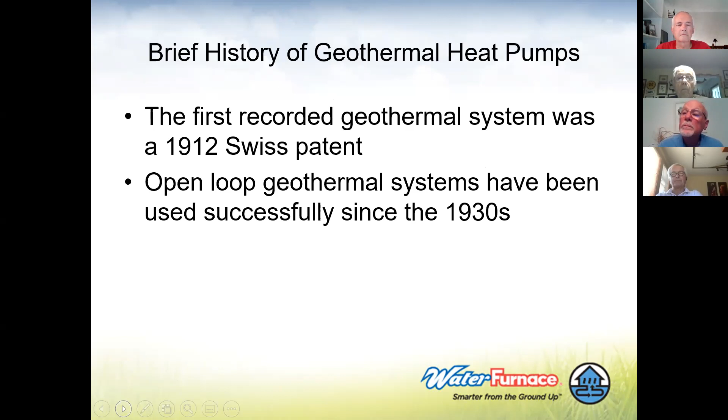Brief history: they recorded geothermal systems back in 1912. That was a Swiss patent.

Edison Electric Institute sponsored closed loop research back in the 40s and 50s, and they were doing closed loop systems back in the 70s. The company I work for, WaterFurnace International, has been in business since the mid-to-early 80s, and they've been a leader in the industry with technology, innovation, and training, and everything that's needed to make sure you have a good, viable system.

What it does come down to is transferring heat—it's the thermal conductivity and the heat of transfer, where hot moves to cold. If you have a system producing a 10 to 15 degree temperature difference, either through the fluid running through the loop or from an open water loop where it's a pump and dump, there's a great amount of energy to be exchanged or transferred.

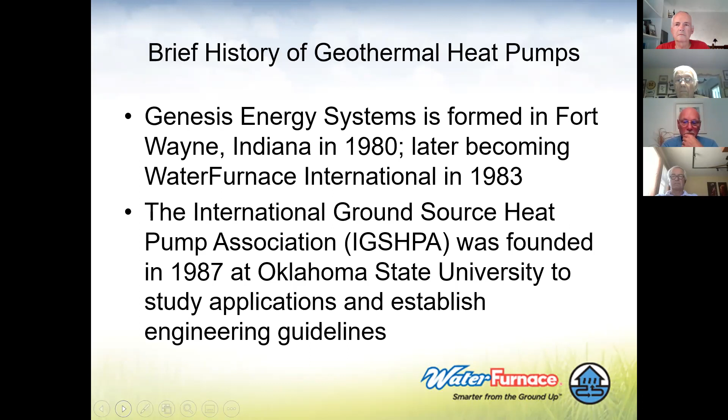In fact, it's 400 to 500 percent more efficient than a gas fossil fuel appliance would be.

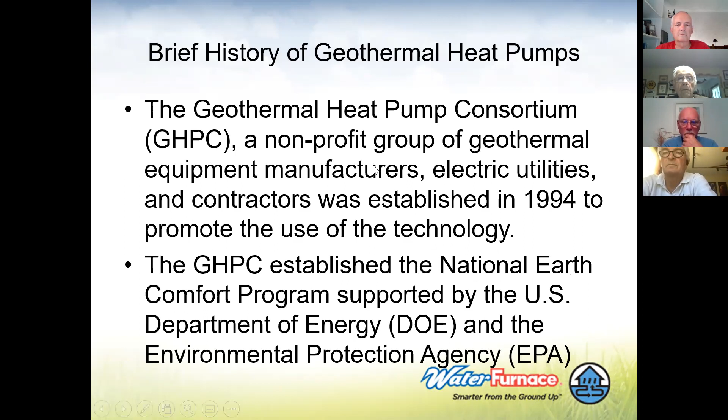There are some organizations—we have the IGSHPA organization, based out of Oklahoma and the college there, and they've done a lot of research and helped build our industry with training and thermal conductivity testing, making sure that loops are sized properly to the systems and BTU loads.

But basically, we're trading off electric—we're using electric and gaining BTUs. And basically, they say 60 to 70% of the energy we use daily is to keep us comfortable, whether in our houses, our homes, or our businesses.

So now we're using a low temperature geothermal, whereas they also have high temperature geothermal, out in hot springs and geysers and so forth, where they are trapping that energy and doing more with that type of energy—transferring it into turning turbines and actually generating electricity.

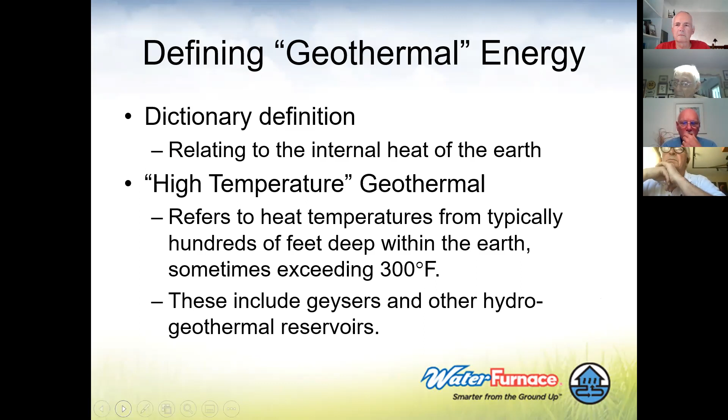But we're using a low temperature type of geothermal where we're using shallow earth temperatures. What makes that such a viable thing, especially in the heating season, is that the earth always stays at 50 to 55 degrees. But actually, when I go further up north and we do our load calculations on a Geolink program, I'm seeing that we're using earth temperatures up north—let's say north of Traverse City—about 45 degrees, compared to down here, which is like 50 to 52 degrees.

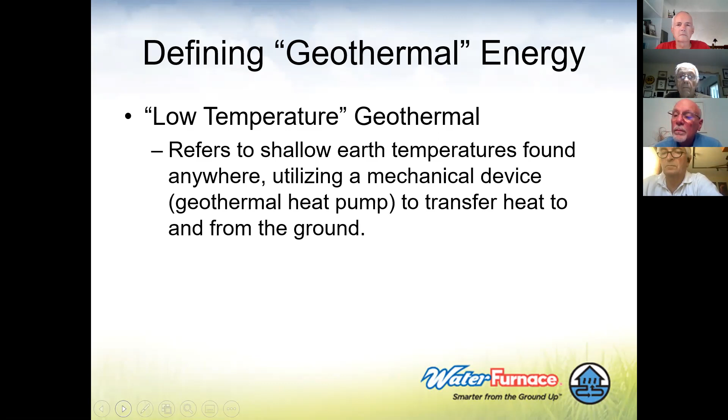So we do take that into consideration—how the earth temperature varies with the different climates depending on how far north you really are.

So we have water-to-air or water-to-water systems, where a water system would be similar to a boiler, and we're connecting it to a plastic pipe buried out in the earth. You could put it in a pond, or put a lake plate in, or do an open loop where it's pump and dump, as long as you have good, clean water that doesn't build up scale or minerals. And again, all we're doing is transferring heat.

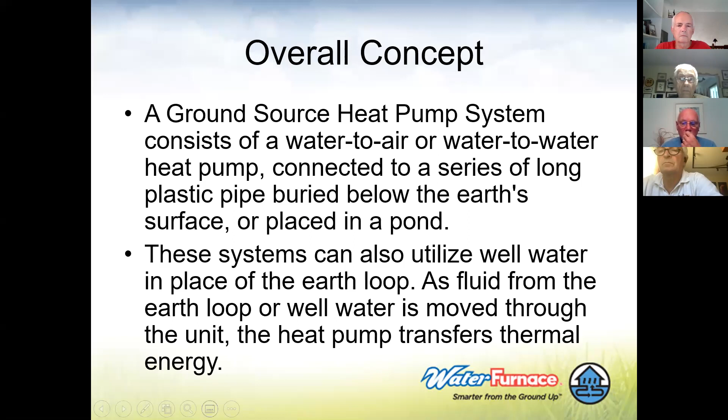So it's a big solar collector. The Earth is. It's storing our heat energy, and then air temperatures may fluctuate.

So like an air conditioner in the hot, humid summer days right now, we're getting rid of the heat in the home, and as we're discharging in the air product, it's hot air. We're trying to discharge hot temperature in the hot air.

Air conditioning, I'm gonna brag about this. My cooling bill in a 3,000 square foot home, calculated and monitored on our Symphony system, is about $25 a month here during these hot days and winter months. Yet I'm using more electric in the winter for my heating, but in the summertime, oh my gosh, the cooling—and it's great for the power companies because it helps reduce peak demand.

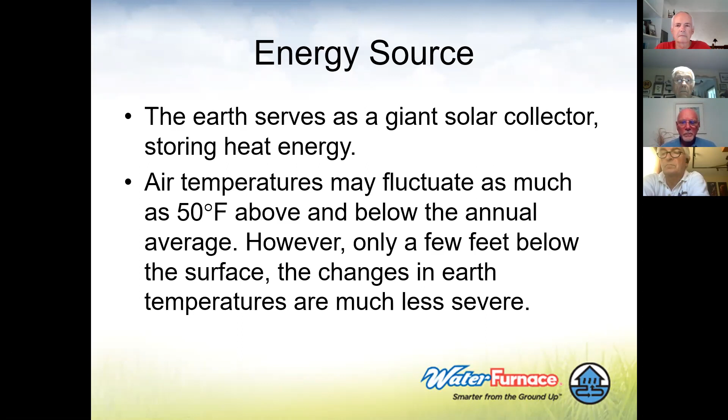But outdoor air temperatures, when you need an air conditioner to be most efficient, it's not, because it's hot and humid, and it's hard to get rid of that heat that we're working with.

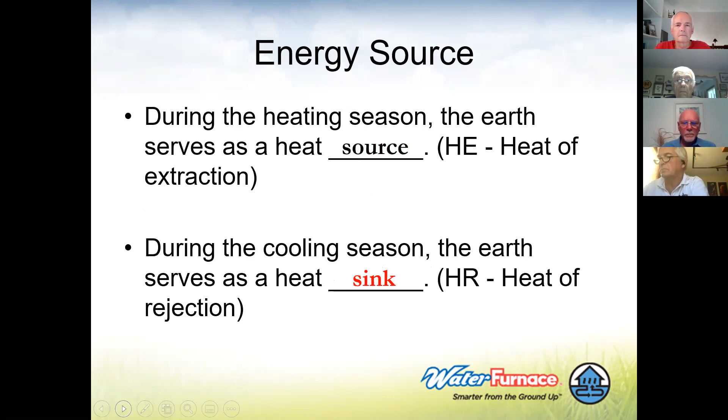So we're using the heat as a heat of extraction for the heating. We're pulling heat from the earth, and then in the cooling season, we're doing heat of rejection, where we're rejecting the heat back into the earth. That's our source, what we're getting from the earth. And then when we do our sink, that's what we're pulling from the loop and bringing into the home.

So we can put the loops horizontal, vertically, or lay them in a pond.

We do use antifreeze in the system, and it's usually about 10% of the system. A 4-ton system, which is like 48,000 BTUs, would have about 4 circuits, maybe 400 to 600 feet in length in plastic tubing, and might hold around 100 gallons of water. At that point, you're using about 10 gallons of ethanol, or you could do it all in glycol.

Also, that food-grade, safe type of product with glycol—but with the mixture of ethanol, it's not very harmful at all if you did have a leak, and it does evaporate. But it is one of the best ways to keep your loop medium from freezing and still have a really good heat transfer.

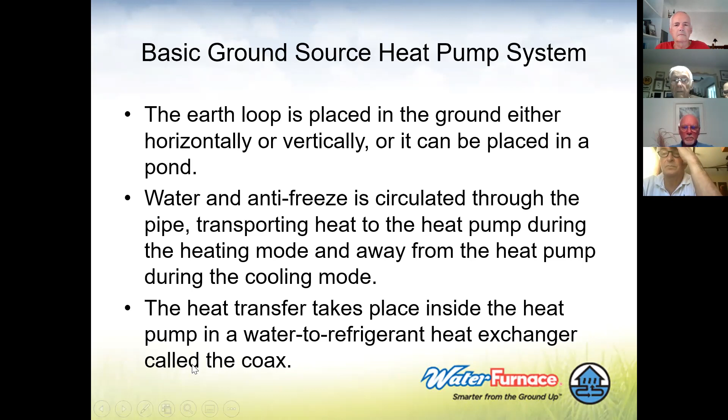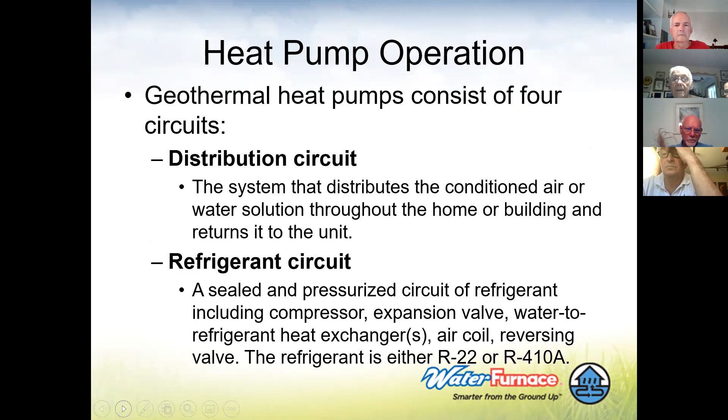And that's happening in what we call the coax heat exchanger inside the unit. So we have a distribution circuit, that's where we're moving the water solution from the loop area out into the unit, into the house. And then we have a refrigeration circuit that transfers that heat and brings it to a higher temperature for heating, or again rejects it for cooling.

And with refrigerant—if not everybody knows how a refrigerator works—we're actually just removing heat from the space. The evaporator inside your freezer takes liquid refrigerant and atomizes it to a fine mist. And when refrigerant is a fine mist, it absorbs the heat.

So as we absorb the heat in that space, that gas is then compressed in the compressor and condensed back to a liquid, which is your condenser, back underneath or behind your refrigerator. And that's where we reject the heat. So refrigerant in a vapor state absorbs heat, and refrigerant in a liquid state rejects the heat.

And that was the philosophy and invention of Mr. Carrier, basically, who's one of the gentlemen that patented that type of system.

But then we could also take the heat that we're rejecting from the house for air conditioning, and apply that heat to the hot water and give you free hot water. We call that a hot water generator. It also generates hot water for—

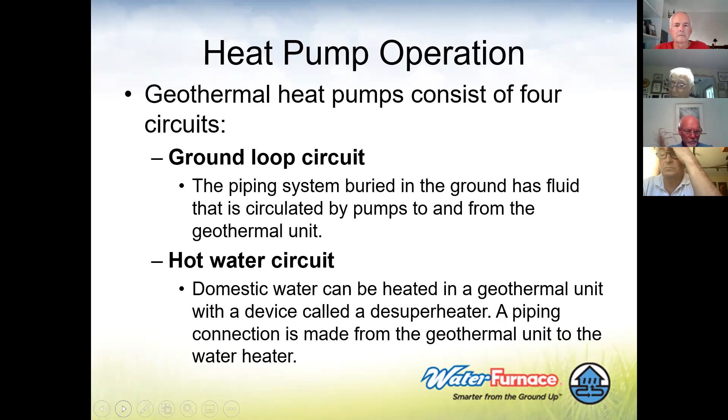during the heating season, but basically the geothermal concentrates and works mostly to heat the home.

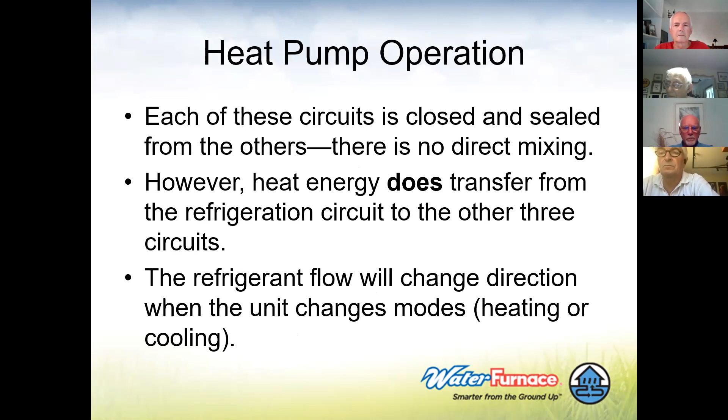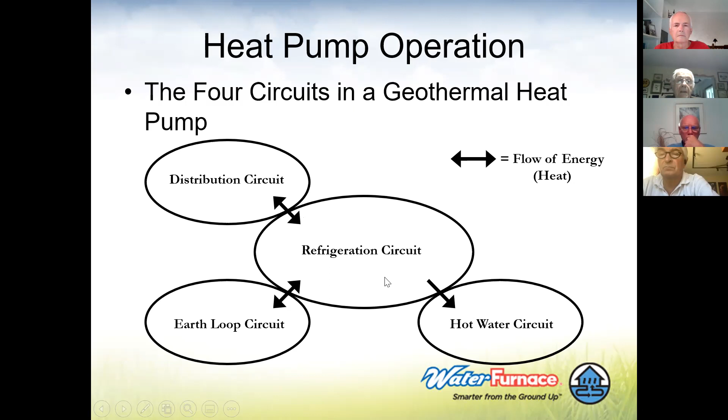So we do sealed transfer again of the water that goes through the loop through the refrigeration circuit, which is called a coax coil. This is kind of like a flow of how everything works. You've got your earth loop, heat moving to the refrigeration circuit, heat moving to the hot water circuit, and your distribution circuit. So it all works in conjunction.

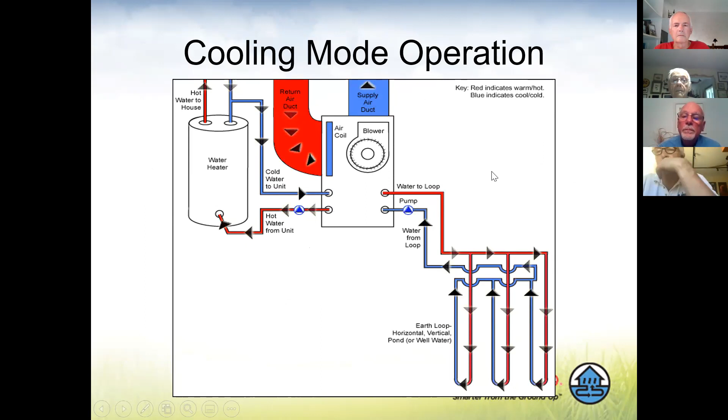And if we had an open loop system, you'd be using your well pump, which is a 230 volt, half horsepower pump that uses a lot of energy. We go about 2 gallons per minute per ton. So if you had a 4-ton unit, an average size unit, you're using 8 gallons a minute as the unit's operating.

And if you think about it, that unit operates 2,800 hours a year—you're moving about 1.25 million gallons of water. So you have to have a place to dump it, either a pond, a dry well, or a lake. And you could go up to 10 tons of capacity into a public pond or lake.

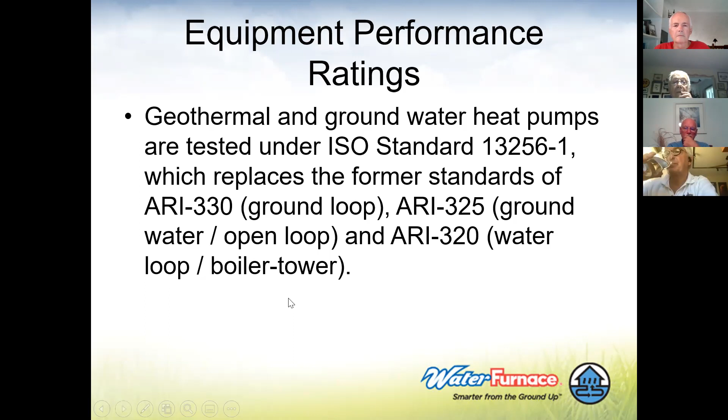We're using plastic piping that is similar for the loop material. It's fused together with hot irons at 450 to 500 degrees, similar to the yellow plastic pipe they use for natural gas piping.

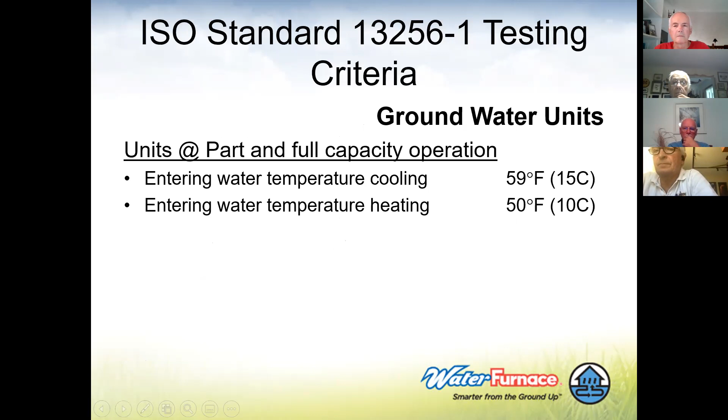A lot of the capacity and efficiencies are based on what our temperatures are and what loop we're working with.

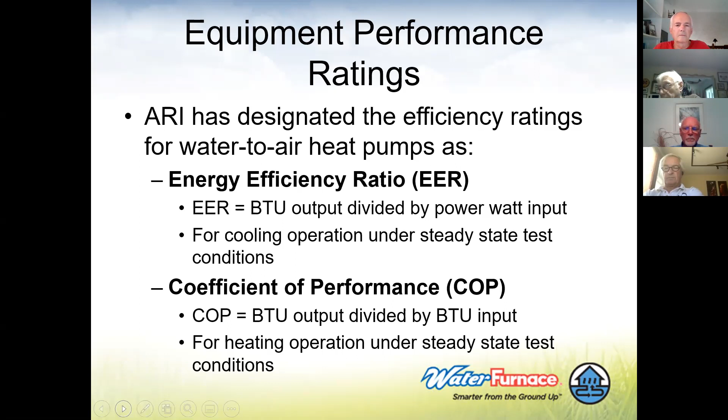They also compare our energy efficiencies against air-to-air products, where they use a SEER rating and we use an EER rating, an energy efficiency rating based on full load, for air conditioning. In the heating mode, it's called coefficient of performance, and most geothermal units run anywhere from 3.5 to 5.0 coefficients of performance.

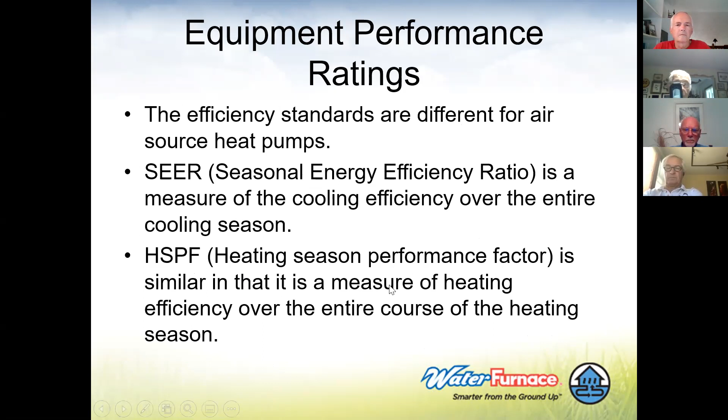Those standards are different for air source systems — seasonal energy efficiency ratio, which measures cooling efficiency over the entire cooling season. Their heating side is called the heating season performance factor, measuring efficiency over the entire course of a heating season.

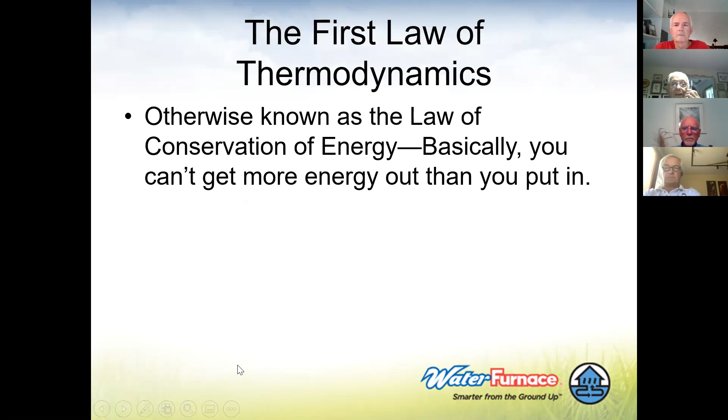The first and second laws of thermodynamics involve conservation of energy. Basically, you can't get more energy out than you put in. The second law is that heat energy flows from an area of high heat to an area of low heat — you cannot stop that process, you can only speed it up or slow it down.

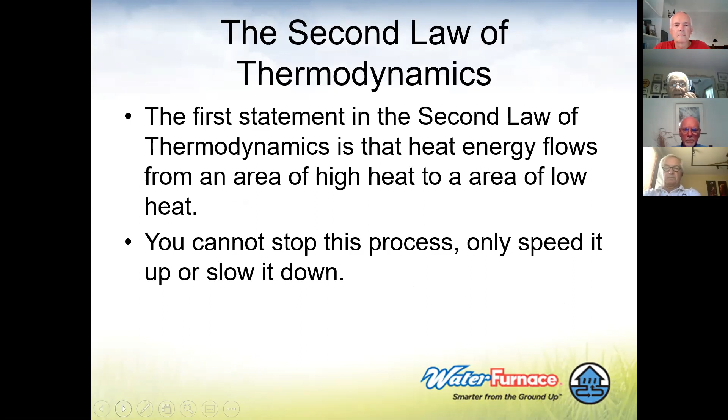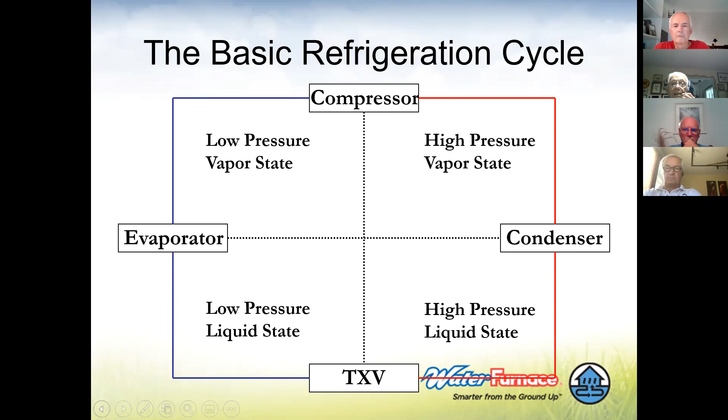A lot of people don't understand how a refrigerator gets cold — they just say 'I plug it in.' But really, that's what it's all about.

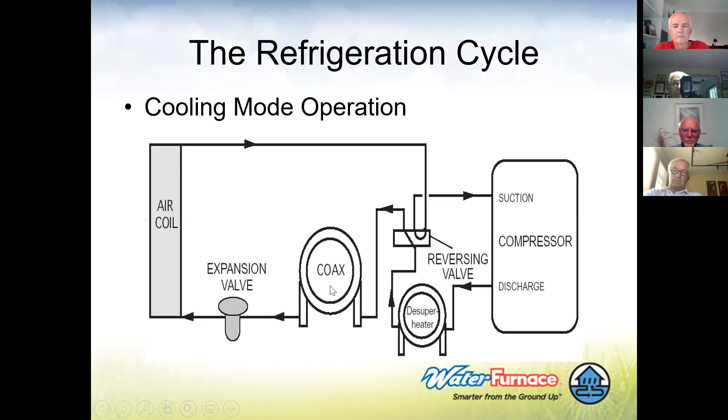Here's our coaxial coil, where our loop water and refrigerant coexist with each other — that's one reason why they call it coax. That's where we transfer heat and cooling when it's operating. There's a reversing valve that reverses the flow of refrigerant in the opposite direction, which changes the evaporator to a condenser and the condenser to an evaporator.

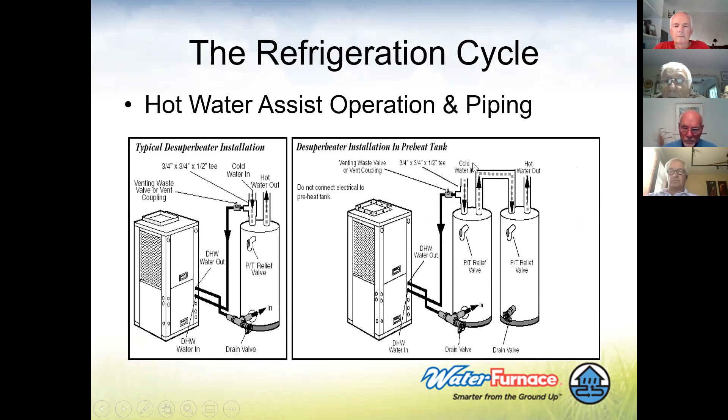Then we do hot water assist, which we call a desuperheater. We connect it to the unit and like to go to a storage tank, because the storage tank holds that hot water — all that free heat. As you start using hot water, it's already preheated and you're using a lot less energy.

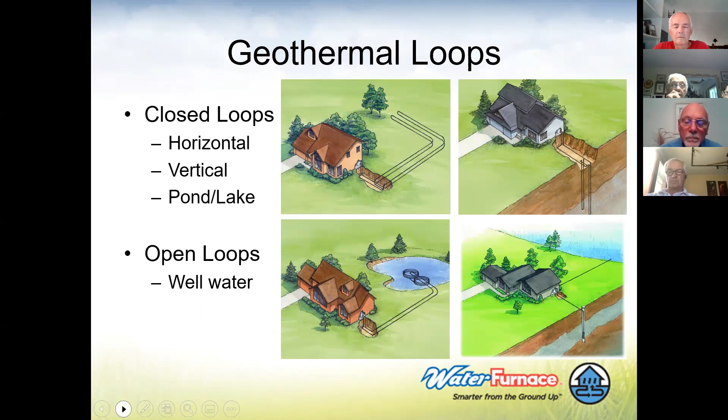So you've got your horizontal trench loop here, vertical loops, an open loop pulling groundwater, and pond loops. They could also put in lake loops, or what they call a stainless steel lake plate, and these could also be put in as a slinky. Let's say these loops are maybe 150 feet long with 2 pipes in there — you could actually put 4 pipes in there. They'll also lay a slinky pipe down in this trench, which can hold more pipe in that space and still have very good heat transfer. We're using the polyethylene piping.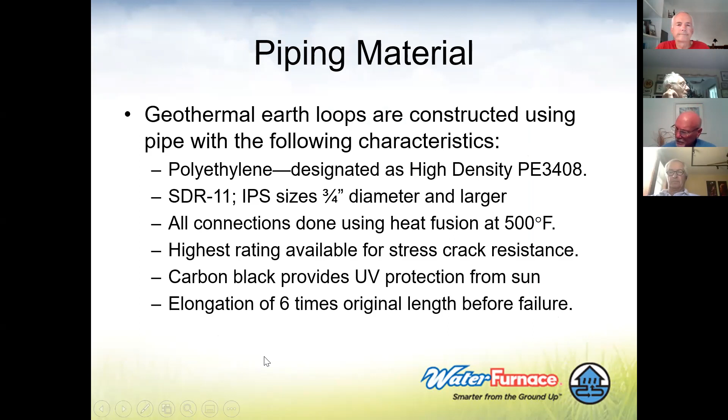Normally our size is 3/4 inch out in the loop area, and we come back to like 1.25 inches. But as the systems and houses are bigger, you might have 3-4 systems and 2-inch pipe coming into the house. Or in a commercial application, I've seen as big as 12-inch main coming in from the different well circuits outside.

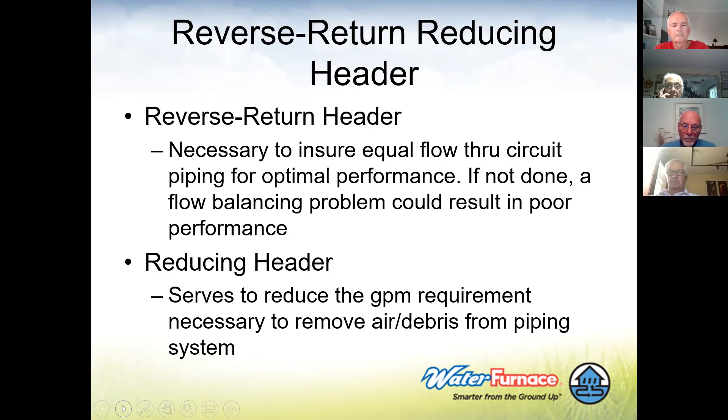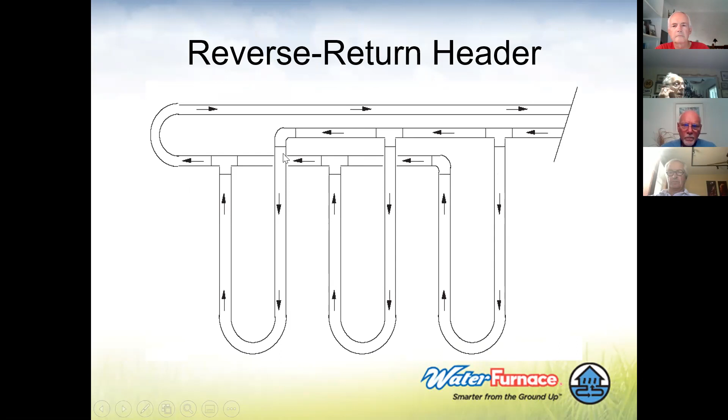They do a reverse return header, and they do a reverse and reducing header. So as they do our header out here for the looping, for each circuit it's a reverse return, bringing the water through and then bringing it back. It mixes everything up good. We also like to see as much air removed as possible. They use a flush cart to fill the system up and also remove and extract any air that might be in the system, since it's a closed loop system.

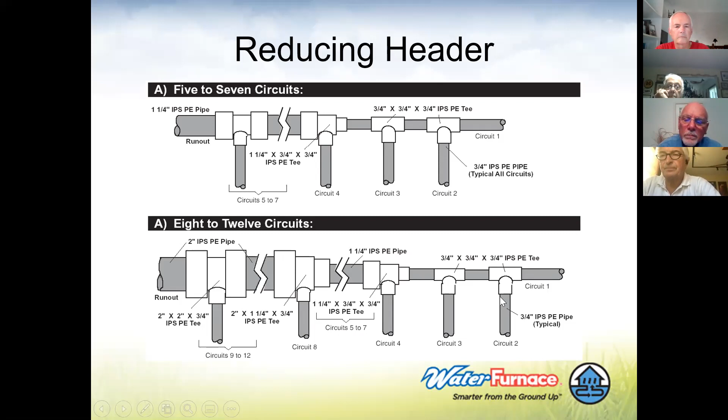Now here they are showing a reduced setup, like 8 to 12 circuits. So they're using 2-inch PVC or PE pipe down to 1.25 inches, down to the 3/4 inch circuits. And again, that's all about pump pressure and head pressure and working efficiently with our pumps, so we're not creating more energy trying to pump a system that has high head pressure.

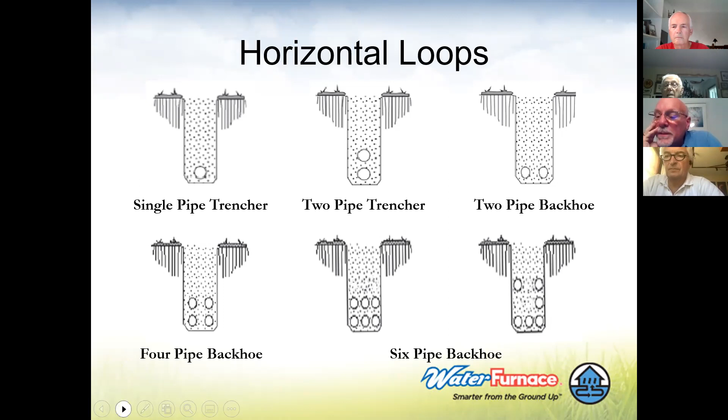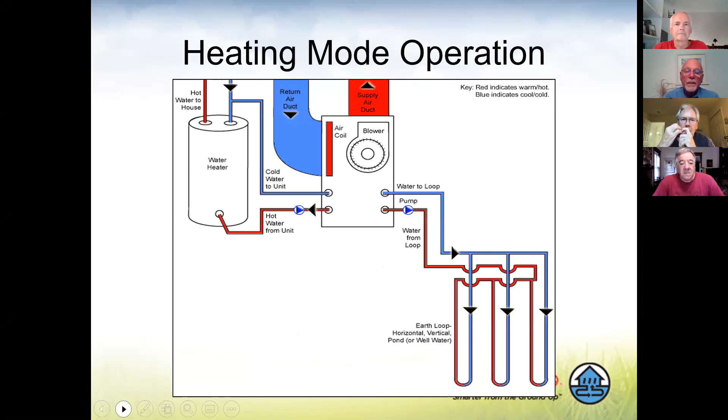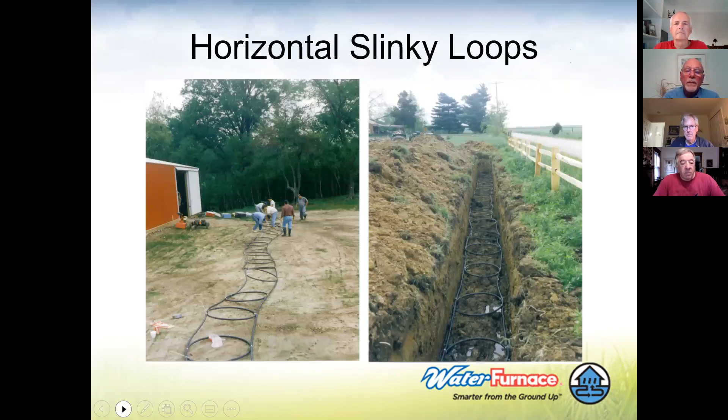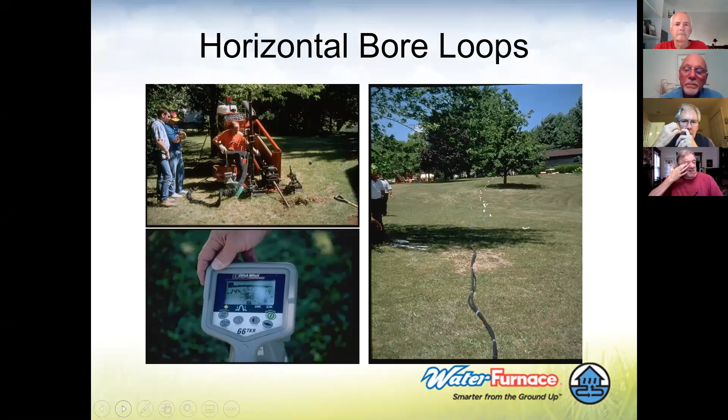So here's the slinky loop. And then they were doing horizontal directional bore, and that does get a little more expensive because they're charging us more to use that machine to do that. Same thing with vertical bore. When they come out and do vertical, we're paying for a well guy to come out with a $750,000 machine to drill 200 foot down and drop our pipe in.

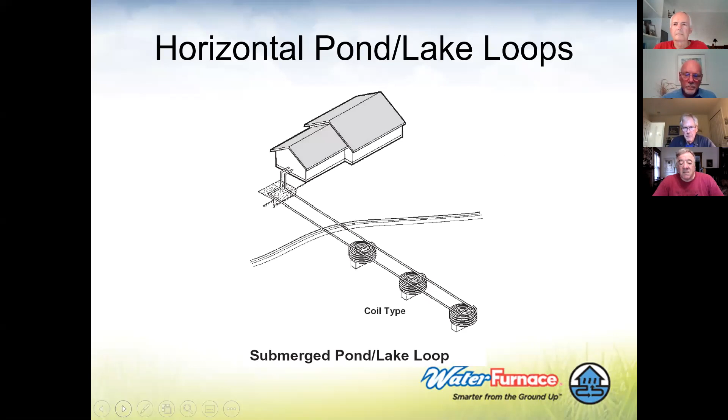And then our contractor comes back and digs horizontally and connects all that up, about 5 foot down. But they also use these coil pipes set up for horizontal pond or lake loops, and they'll use them in 300-foot coils with spacers in between to help transfer heat more efficiently.

Here's a big job going in a school, they'd lay that in a big pond. And here's the lake plate, Slim Jim. So they could lay that under their dock or something of that nature.

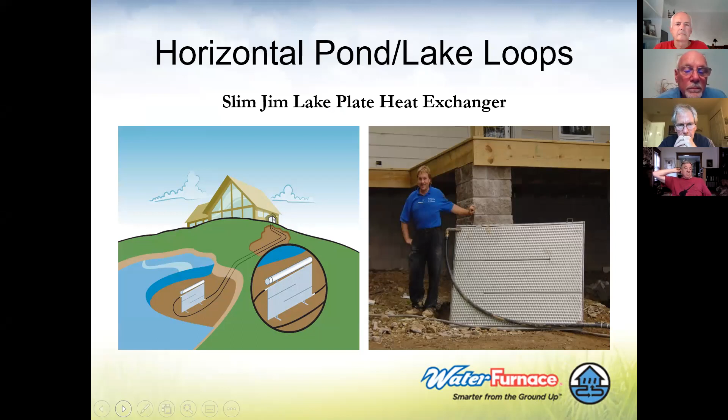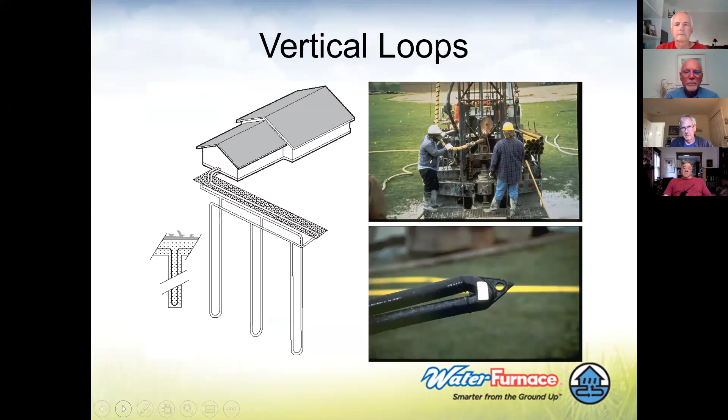Again, here's our vertical setup, and I have 5 vertical bores, 200 foot deep, so each circuit's only 400 foot of pipe. If I was going horizontal and had the room to do it, I would have probably 600 foot of pipe, just because of our constant earth temperature being at a deeper depth.

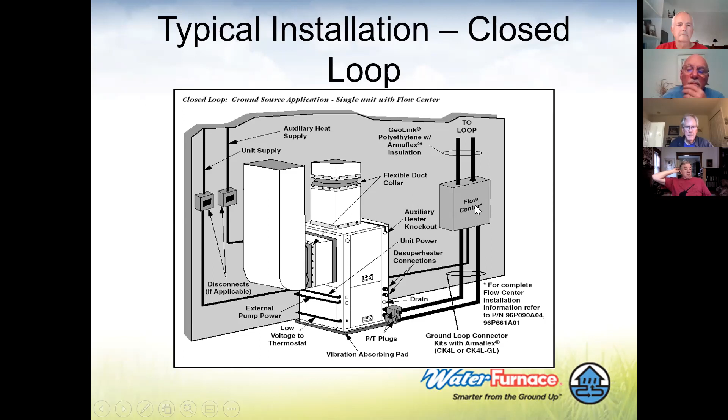So here's our closed loop system. We have our flow center over here, our piping comes to the unit, and we have our return air and our supply air. And I don't know what happened there, I just hit the button again.

So here's our flushing and filling. They're using a flush cart, and we like to use the cleanest, best water you can. Some job sites might have dirty, hard water, and you might have to bring in distilled water, spring water, or filtered water, even city water that's filtered. But you definitely want to fill your loop with good clean water.

And when I did mine, I went and bought 110 gallons of water. It was about 80 cents a gallon, but I figured I had good distilled water and shouldn't have any troubles for many years to come.

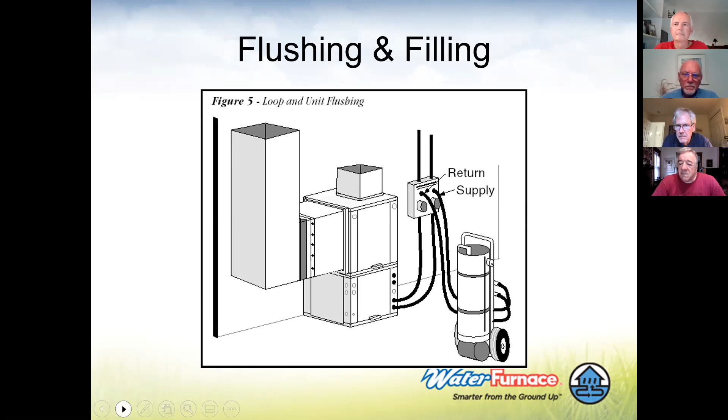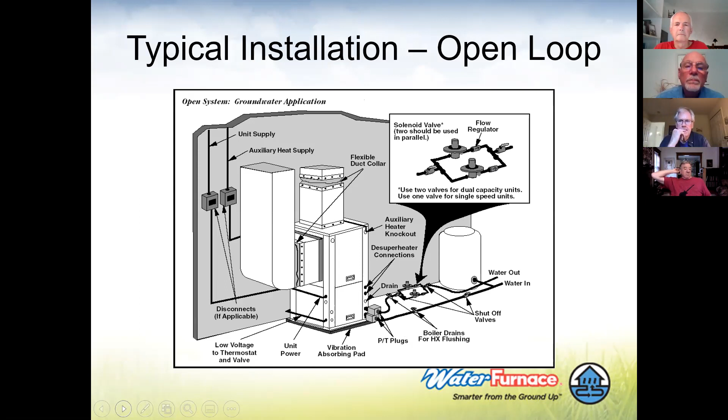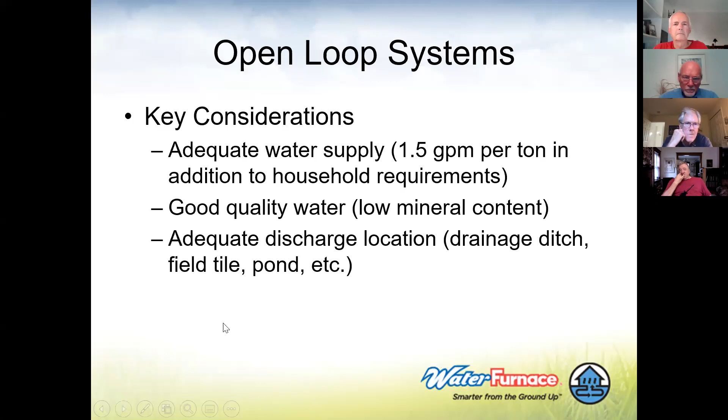In the open loop, pump and dump system, they're using flow regulators. They have a mechanical valve that opens and closes to allow the water to come through. They also isolate that so they can flush the system in case we have any minerals or buildup in our heat exchanger, our coax coil. They talk about the 1.5 gallons per minute per ton, and we like to see up to 2 gallons a minute in Michigan. They're showing a pump and dump discharging into a lake or pond.

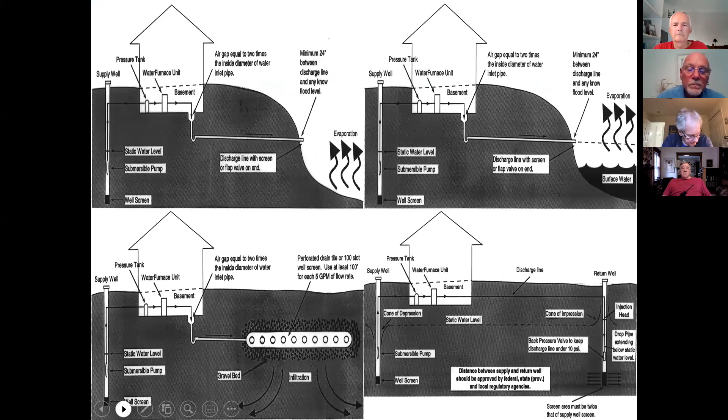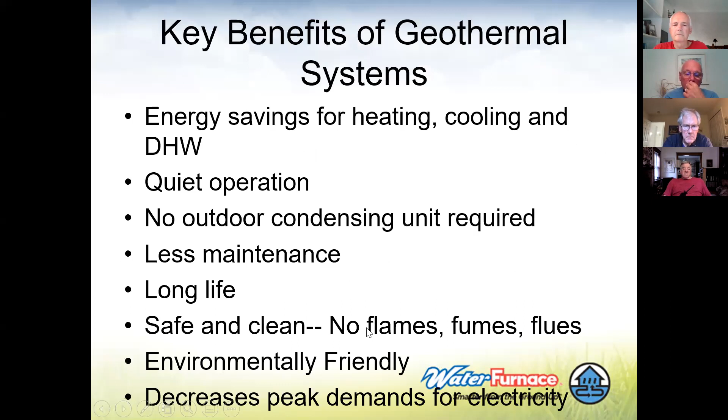So key benefits: energy savings. It's quiet, it's an indoor unit, no outdoor condensing noise, less maintenance in the long run. We have a longer lifespan than outdoor equipment. Safe and clean, no flames, no fumes, no flues. Environmentally friendly, it's carbon free, and we reduce peak demands of electricity in the summer.

Commercial - office space, retail, hotels, all of it. They're getting a lot more opportunities in the commercial industry. What's really cool about a commercial job, you'll have a computer room that needs air conditioning all year round, and the outer office areas might need heating. Your loop will work in reaction, pulling heat from that air conditioning space for the computer servers and putting that heat in the loop, then pulling that heat from the loop to heat the building.

Or I like the idea of in C-stores, convenience stores with coolers - we could pull heat from the coolers all day long, and that heat can be utilized in the rooftop units for heating. Or in my situation, I'm using a water-to-water unit to heat my domestic hot water.

In the summertime, I'm putting heat into my loop, and I've never seen my loop get over 65 degrees. Every morning when we take showers, we're pulling heat from the loop and putting it into our hot water, which makes that loop even more efficient.

In the southern climates where it's a primary cooling industry atmosphere, like Oklahoma, Texas, those areas - they're cooling all the time. They've had problems getting hot loops where the ground's so dry and they don't have enough moisture, and they get hot loops up to 80 to 90 degrees, which is still somewhat efficient if the outdoor temperature is 110, but still, we like to have cooler loops than that.

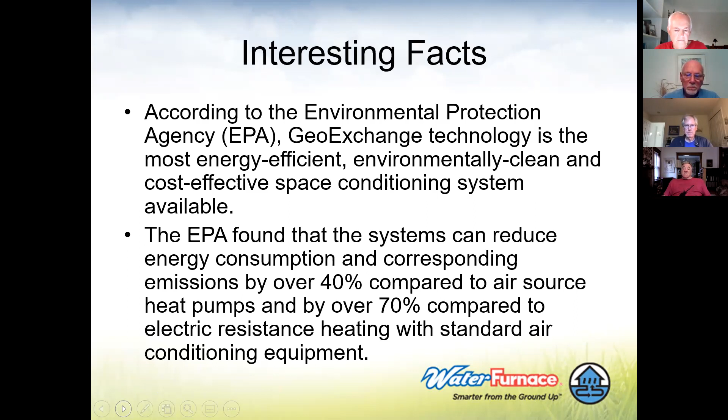Also works for snow melt, in-floor heating, all of that. And we have units up to 300 tons now.

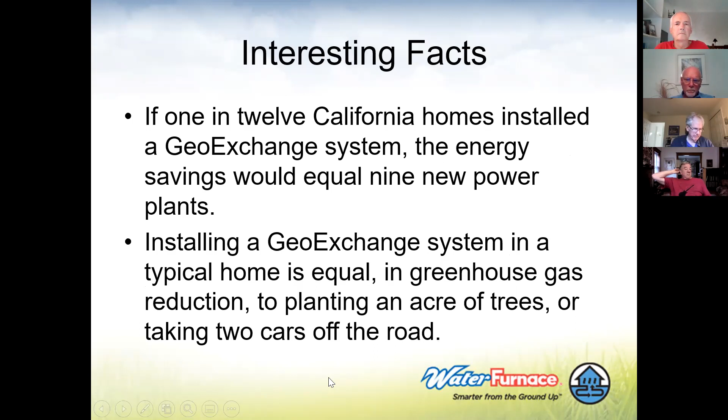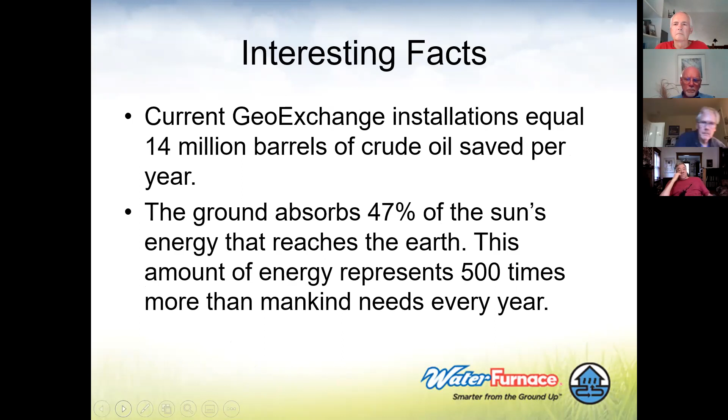Preventative maintenance - you're going to check, look for any leaks or any connections that might have vibration or noise. Same as you'd have with a furnace - you have a blower wheel, you've got to change your filter.

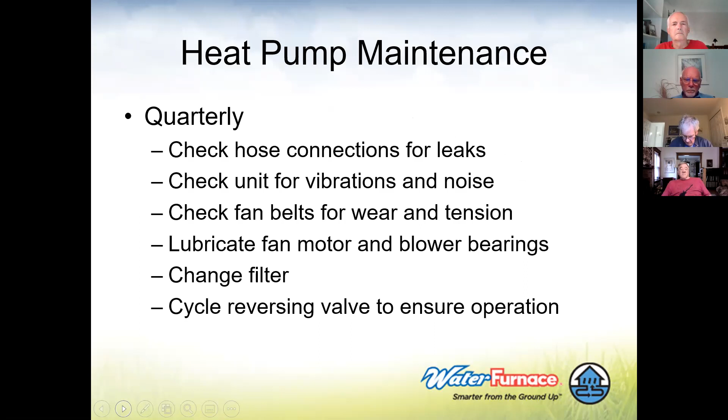After a year or two of operation, normally the loop should be repressurized, because during the heating season the loop contracts and during the cooling season it expands. Sometimes you might get a little air that builds up in there and gets caught where the pumps are, and it could cavitate a pump. We just want to make sure we're in that 30 to 40 pound pressure range of the loop with no air at all in the water.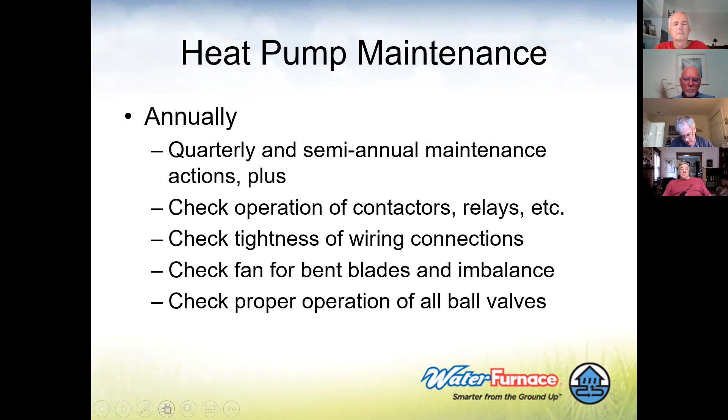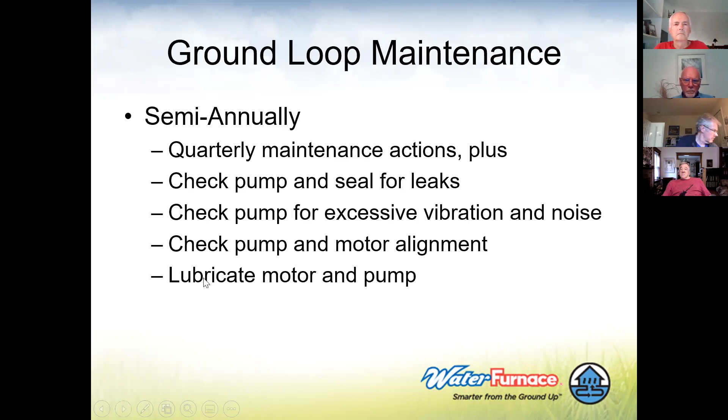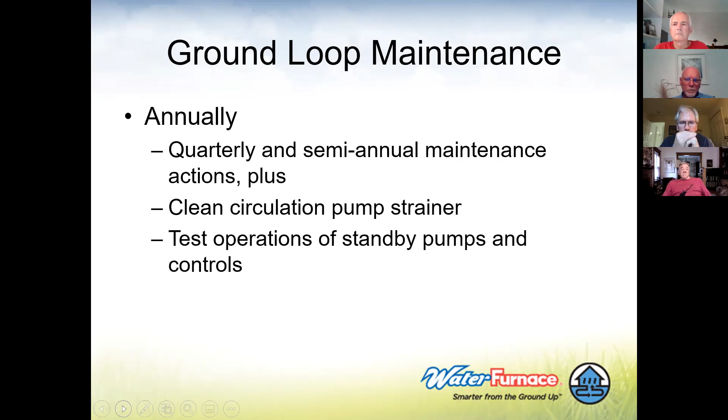Just do regular quarterly and yearly checks - check the ground loop pressure, loop antifreeze. They're getting into semi-annual checks, but I'm seeing that stuff done basically semi-annually and annually. They've got strainers you can put in the system to help catch any of the minerals or debris in there.

And I'm down to questions. Anybody have anything they'd like to ask?